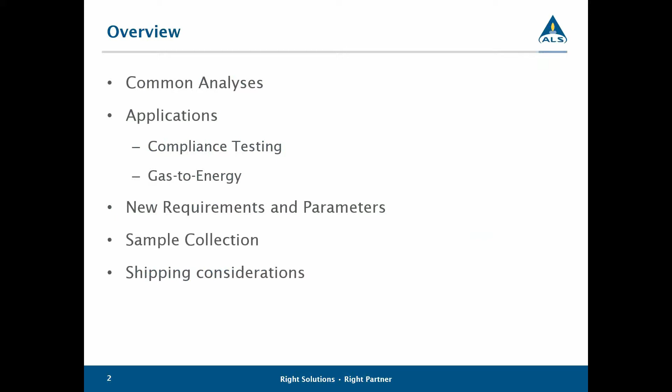and where might they be coming from? A big question that we get a lot is, how do we collect these samples? How do I collect them? And then how do I get them to the laboratory? So those are some of the things that we'll be talking about. As Jared indicated, we are taking questions, and we'll have a pause about halfway through. So without further ado, let's talk about some of these parameters and methods.

In landfill gas and biogas, we most frequently see our clients asking for characterization of these parameters: methane, TGNMO or NMOC, fixed gases other than methane. Sulfur compounds are often of interest in digester gas, biogas, landfill gas. For customers that are interested in the BTU value, we also support that. VOCs and siloxanes. Now, there may be other methods that are available, but as an environmental laboratory, our specialty is in environmental methods that come from either the EPA compendium from source testing, which is where EPA 3C and 25C come from, or from the TO compendium, which was developed for ambient air.

When I reviewed the methods in the EPA compendium, I really just found two methods that specifically cite landfill gas, and 25C is one of them. And that's what you may have requested for TGNMO. Similarly, the sulfur analysis is one of the few ASTM methods that I could find that specifically address landfill gas. So this matrix, landfill gas, biogas, digester gas, these are matrices that don't have a lot of methods that I could find that are specifically developed for that matrix. So you're going to have to use methods from other practice areas that are either modified or adopted for landfill gas.

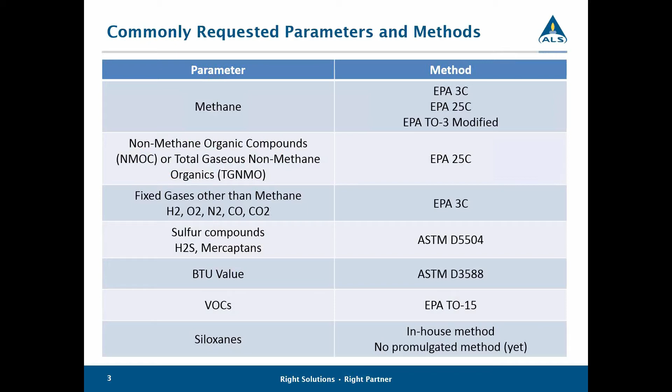So under what situations do we get inquiries, and what applications and practice areas are people doing this kind of testing? Well, for routine monitoring, we get inquiries at landfills, but sometimes you may be required under compliance testing or for permitting to do some of these tests.

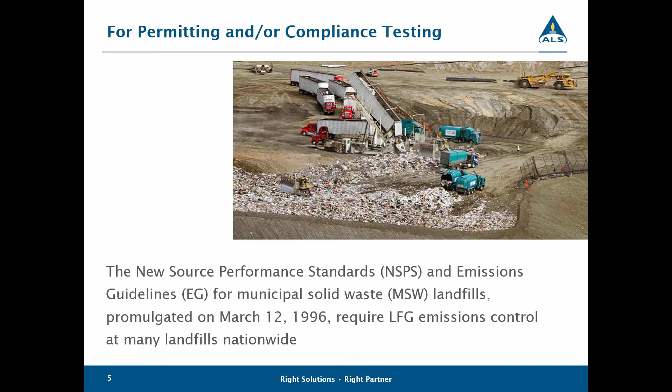The New Source Performance Standards and Emissions Guidelines for municipal solid waste landfills require landfill gas emissions controls. And this rule provides the owner and the operator of a landfill with a tiered system for determining if controls will be required. So what that means is that under Tier 1, an owner or operator of a landfill can calculate what the NMOC emission rate would be. And if it's less than 50 megagrams per year, then they submit a report and just recalculate it.

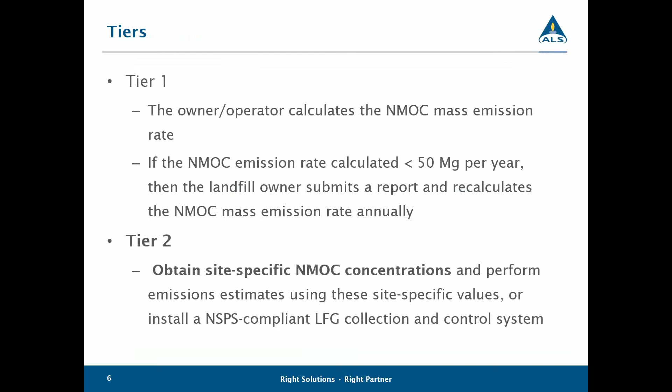Tier 2 testing is where you have to actually determine the concentrations. So we get inquiries from our clients to perform Tier 2 compliance testing. The thing that makes this different than the routine monitoring or routine testing we might see for some of these parameters is how the laboratory needs to run the method.

In Tier 2 testing, EPA 3C, which can be used for fixed gases for methane, carbon monoxide, carbon dioxide, oxygen, nitrogen, hydrogen, per the method, it has to be done with a duplicate injection. And this is what's required under Tier 2 compliance testing. Similarly, the method for NMOC has to be run in triplicate.

So if you are going to be doing Tier 2 compliance testing for your landfill, it would be important for you to communicate that to your laboratory prior to the analysis to ensure that they run it properly. Otherwise, for more routine applications, the laboratory would do a single injection for both of these methods. So if you're doing Tier 2 testing, you just want to make sure you can communicate that to the laboratory so that they can perform it in a way that will meet your requirements.

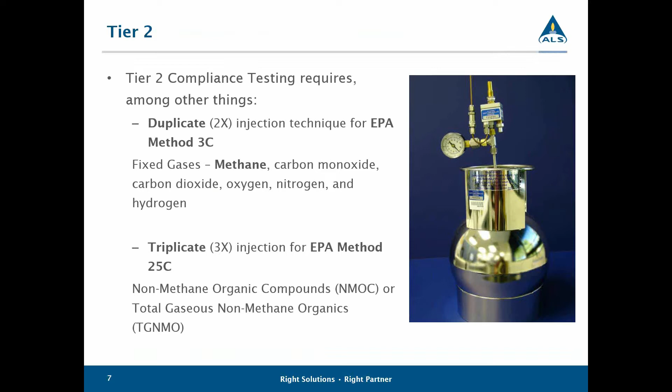We also see many inquiries for these range of parameters for our clients that are involved in gas to energy applications, which we have really seen increase in the last few years as facilities are looking for ways to capture the gas generated from their facility, whether it's a landfill or if they have a digester, and either using that gas for their own facility's needs to power their own turbines or their own vehicles, or if it's refined enough and clean enough to sell it back to the grid.

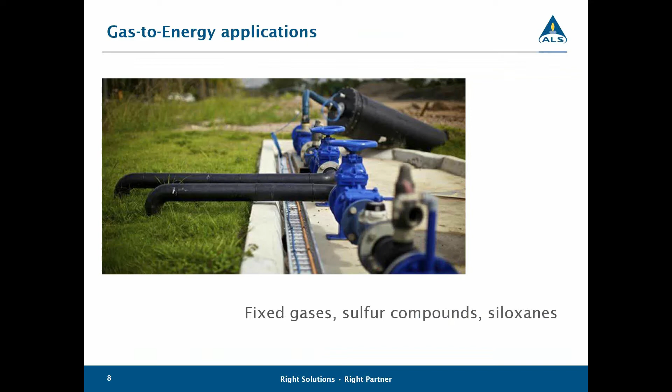The parameters that we typically see requested for these applications include fixed gases, sulfur compounds, and siloxanes. Siloxanes represent a specific challenge. Siloxanes refer to this functional group, which has a silicon, oxygen, and silicon functional unit. They can be branched compounds, they can be cyclical, like the compound on the left here, which is referred to as D5, decamethylcyclopentasiloxane, or they can be linear, like the compound on the bottom right, which is L3.

Also, it's octamethyltrisiloxane. These chemicals are of interest in gas to energy operations in that they can be generated from landfills or from digesters because they can negatively impact the performance of the turbines. Now, the challenge with characterizing these chemicals is that there are no promulgated methods for the sampling and analysis of siloxanes. Promulgated refers to official methods. So there are presently no methods for characterization of siloxanes from EPA or any state agencies.

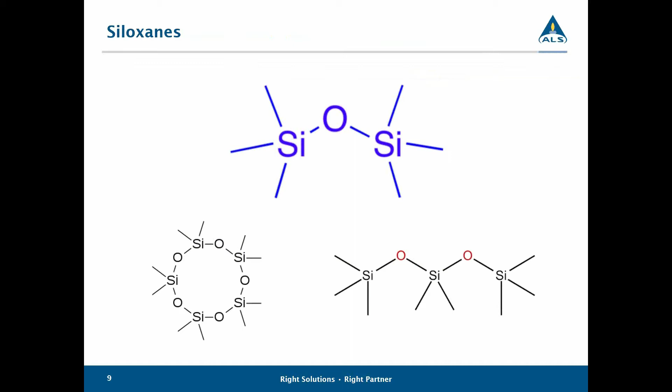That's because method development by those agencies or entities is typically driven by risk, whether it's risk to human health or risk to the environment. Since siloxanes are not currently associated with risk to human health or the environment, there's no driver for an agency like the EPA to develop a method to characterize them. That means that in order to do that, laboratories have come up with their own methods. So there are many methods that are available commercially, but they have all been developed independently by laboratories.

What that means is that there can be many variables in the methodologies, and it's been very difficult to compare results for siloxanes among different laboratories. There can be differences in the sampling media that are used by these different methods. We are aware that the different sampling media that are used are things such as tubes, Tedlar bags, Summa canisters, oil, and impinger solutions.

The analytical instrumentation can vary depending on the laboratory. Most laboratories use a GC, a gas chromatograph, but the detector that is used can vary from a mass spec, an ICP, or an AED. The calibration standards vary. Some laboratories use liquid phase standards, some use vapor phase. The target analyte list can vary from 5 to 22 chemicals.

The reporting limits vary greatly, and the way that laboratories calculate and then report the siloxanes also varies. So some laboratories report total siloxanes but don't speciate them. Some speciate them and then provide results in milligrams per cubic meter, milligrams silicon per cubic meter, ppmv, ppmv as silicon, or micrograms silicon per meter cubed of methane. So currently, when it comes to characterization of siloxanes, there are a lot of different approaches, and it can make it very challenging to compare results among laboratories.

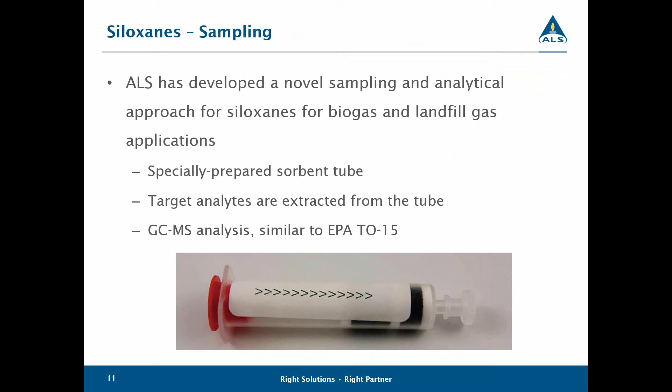Then you send the tube to the laboratory, and we do a solvent extraction to get the target analytes from the tube. And we analyze it by GC mass spec, similar to EPA TO-15. This is what our report looks like. So you can see that we can speciate the siloxanes below. Our results are in micrograms per cubic meter, as well as micrograms silicon per cubic meter. And we also provide a number for total silicon in the report.

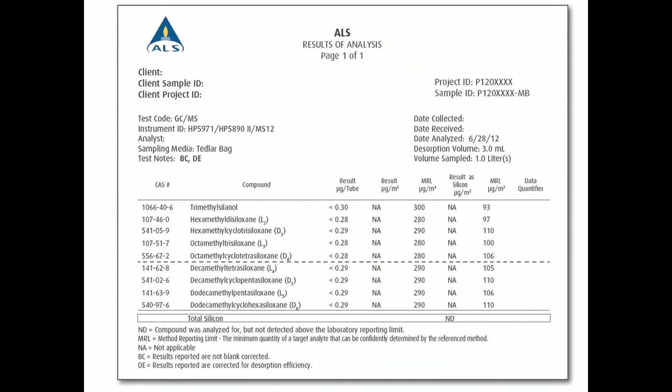So this is what we provide. And again, it can be challenging to compare it among laboratories. So if you get results from different labs, it's important to think about what instrument did they use, what standards, what collection method. As we indicated, there are no methods currently available for siloxanes, but we have been working with the ASTM, and it is anticipated that they will be publishing a method for siloxanes this year in 2018. And it will include our methodology for sampling analysis and QC criteria.

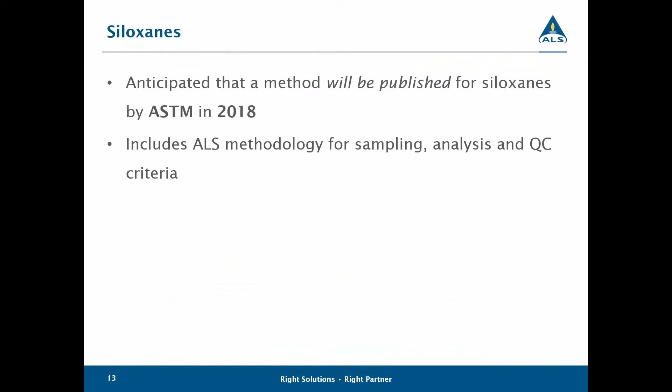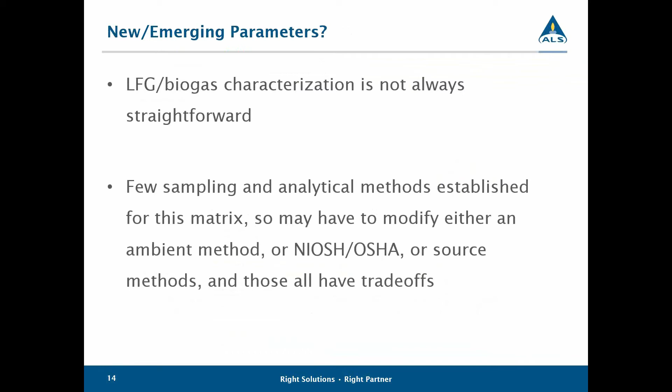Okay, great. Thanks. So we'll move on, and I want to talk a little bit about some of the new parameters that our laboratory has been asked for, and ask you in the audience what you may have been seeing. Some of the parameters that we're asked for are pretty common, the ones that we talked about: methane, fixed gases, VOCs. That's fine. But as I discussed earlier, there are not a lot of sampling and analytical methods specifically for this matrix. So if it's digester gas or biogas or landfill gas, you may have to modify either an ambient method like a TO method or a NIOSH method or source methods, and those all have trade-offs.

Some of the things that we have been asked for increasingly in the last year are some of the parameters on this slide. This is true specifically in California, due in part, I believe, to rules that we have seen from PG&E and SoCalGas with regard to entities who are interested in providing gas back to those entities. So we're being asked now to characterize landfill gas or digester gas for things like metals,

arsenic, antimony, copper, lead, mercury, ammonia, chlorine and fluorine, biologicals like acid-producing bacteria, sulfate-reducing bacteria, iron-oxidizing bacteria, dust, organic silicon, density, moisture, N-nitroso-di-N-propylamine, Wobbe index. Now, some of these parameters are being requested for human health risk as possible carcinogens. Some of them are requested as pipeline protective parameters to make sure that they're not present because they might negatively impact the pipeline. And the challenge with these parameters is that there are no clear sampling and analytical approaches for landfill gas or digester gas.

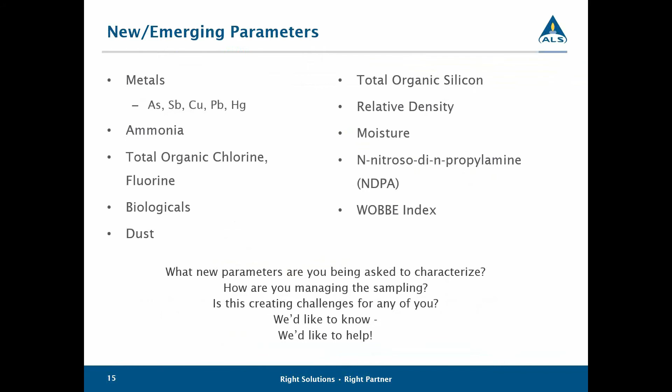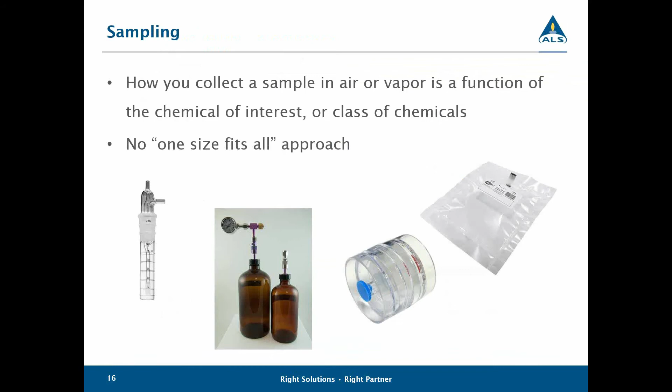So as we move forward and as we get more parameters that we're trying to assess in these matrices, the reality is in the field, you're going to probably have to use more than one sampling approach to get a broad range of parameters.

Once you have the sample, how do you ship it? So landfill gas and biogas, digester gas, typically have about 50 to 60% methane. Well, according to the Department of Transportation, that qualifies it as a dangerous good. The US DOT regulations are dictated by the Code of Federal Regulations, CFR, and according to 49 CFR 173.115, a flammable gas is any material which is gas at 20 degrees C and which is ignitable when in a mixture of 13% or less by volume with air.

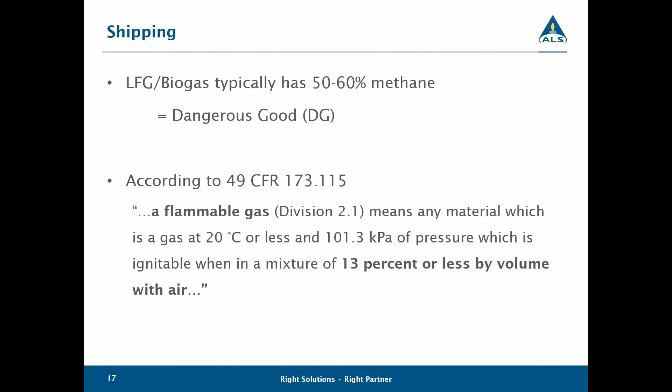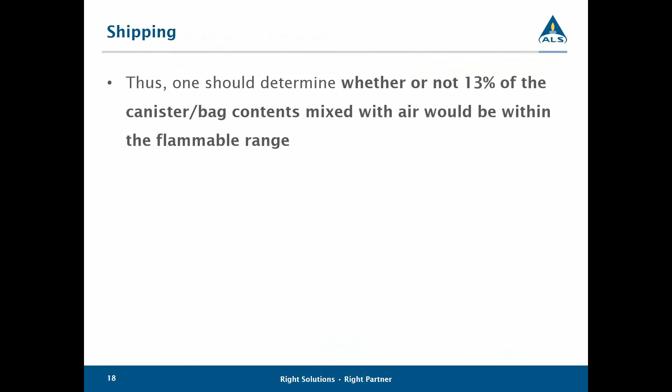So that seems to us to be the very salient point when you're trying to figure out how can I ship my gas. It seems that you then need to determine whether or not 13% of your mixture mixed with air would be within the flammable range for those constituents. So let's look at an example. If you were to collect your gas with a Tedlar bag and the sample was about 55% methane, going back to that DOT regulation in the CFR, 13% of this gas at 55% would be 7.15% methane, 0.13 times 0.55. The flammable limit for methane is 5 to 15%. So 13% of your 55% methane does put it in the flammable range according to that DOT regulation, and it needs to comply with dangerous good shipping requirements.

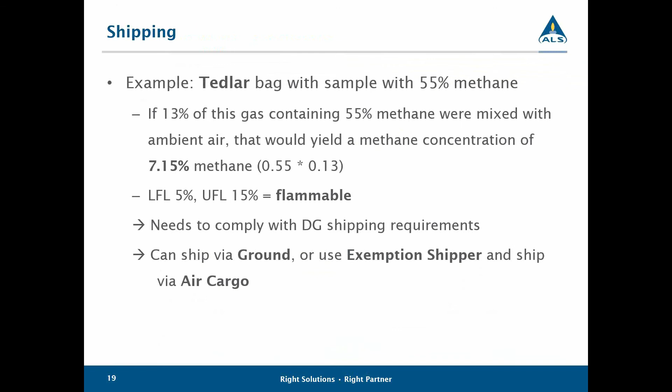So your option for that gas sample is that you can ship it via ground, or you could use an exemption shipper and you could ship it via cargo. An exemption shipper could look something like this. This is an example of a kit that we buy from a vendor. You can buy it as well. You would take the Tedlar bag and you would put it in this can, looks like a paint can, and you bash the top down. You put the can in a box and the box in another box, and you have this packing material. And then this box is a 4G box, and it has labels on it. And this box can go on an airplane, on a cargo.

And according to the DOT regs, you can ship up to 1 liter of flammable, non-pressurized gas in this exemption shipper. And you could put 2 half-filled Tedlar bags in this. This would be relevant when our customers are going to take a sample of, say, landfill gas or digester gas, and it has methane, and maybe they want to characterize it for sulfur. Sulfur compounds only have a 24-hour holding time in a Tedlar bag. So that's pretty short. But I can also say that we receive hundreds of bags on a weekly basis that we successfully analyze within the holding time for sulfur.

So you can do it. If you're going to take this approach, you would need to make sure that you fill out any dangerous goods documentation prior to taking it to your carrier, FedEx, UPS, whatever you use. You would also want to make sure that that location accepts dangerous goods.

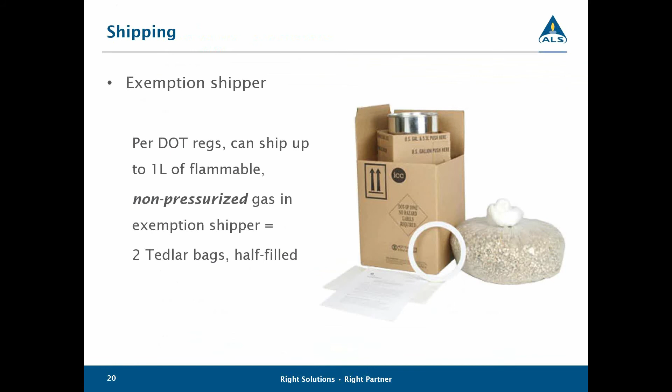Let's say you took your sample with a canister. If you used a 6-liter canister, then again, going back to the requirement, if your sample has, say, 55% methane, if 13% of this gas containing 55% methane were mixed with the air, then your methane concentration would be in the flammable range. And since you sampled with a 6-liter canister, your only option is to ship by ground, because that exceeds the limit that you're allowed to ship by air.

The good news is if you had to do that, it would be fine. Methane has a holding time of 30 days in a canister. So if you did have to ship it by ground, it would be slow and it would be not that expensive, and you could do that. So that's one of the options. If you have the luxury of time and you're not in a hurry to get that result, you can ship it by ground.

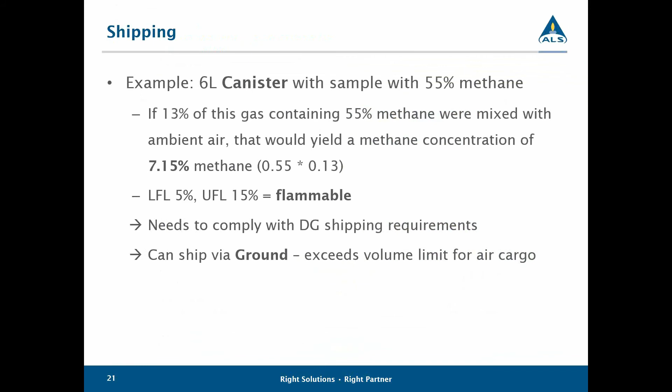Another option, and this is something that we do pretty frequently for many of our customers. You can take this 6-liter canister and clean it, evacuate it, and then partially fill it with some helium, an inert gas. This helium will then dilute the methane out of the flammable range, and you can ship it normally without any dangerous goods. So this walks through the calculations.

If we evacuate our canister to around minus 29 inches of mercury, which is very common for SUMMA canisters, we would then fill it back up with a quantity of helium, which we document at the laboratory with a digital gauge. So we have this information recorded ourselves. Minus 29 inches of mercury where we start. We filled up with a quantity of helium, in this example, minus 17.1.

Then we calculate how much contains helium and how much is available for your sample gas. So in this example, 41% of the canister volume or space is available. So if you then use this canister and you fill it to ambient pressure, or whatever pressure you fill it to, let's say you leave a little vacuum, which we would then calculate at the laboratory, it drops the methane concentration in your canister. And then 13% of that gas now is below the flammable range of methane, and it can be shipped normally without any dangerous goods requirements.

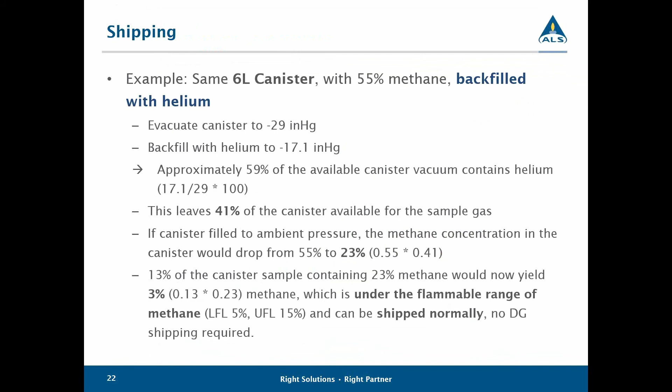Now, ultimately, it is the shipper's responsibility to properly characterize and ship their items. So this is our understanding of compliance with the DOT regulations, but you'll want to confirm this approach and calculations with your trained DOT shipping colleagues. Further, the DOT does specify that specific training is required in order to be able to ship dangerous goods. So those are things you'll want to discuss with your colleagues or with your training department to make sure that you're doing it properly.